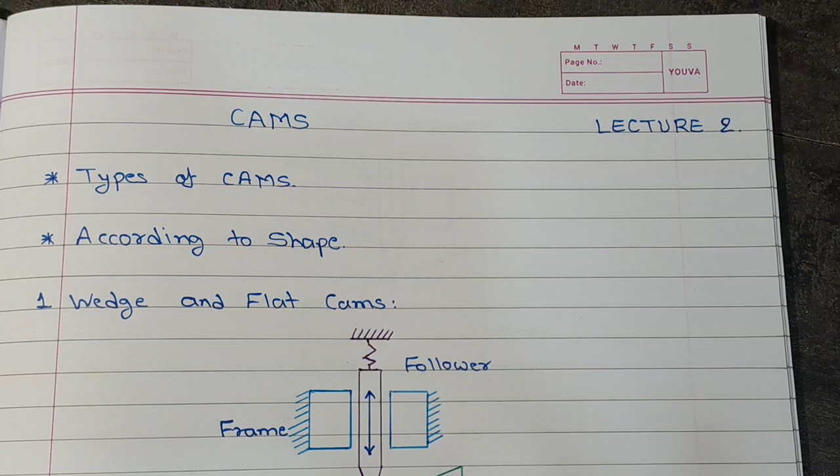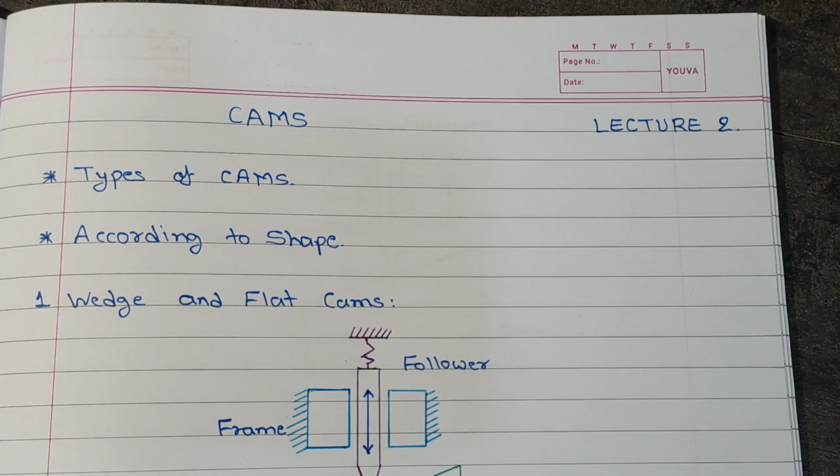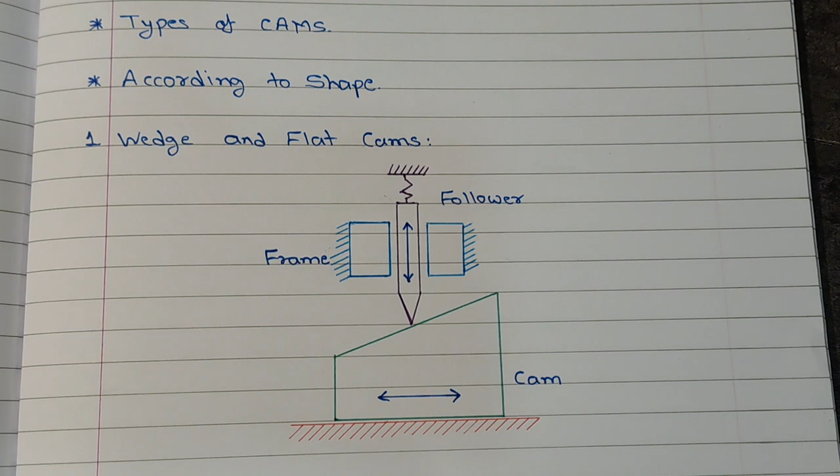डियर फ्रेंड्स, हम कैम का दूसरा लेक्चर आगे बढ़ाते हैं। हमने शुरू किया था दूसरे लेक्चर में कि कैम अलग अलग किस तरह के होते हैं, how the cams are being classified। इन दैट वी फर्स्ट सी द वेज टाइप और वी कैन से फ्लैट टाइप ऑफ कैम्स। उसमें अलग अलग जो अरेंजमेंट थी, ये पहली वाली, ये दूसरी वाली, जो वेज कैम है वो कैसे काम करता है वो हमने देखा।

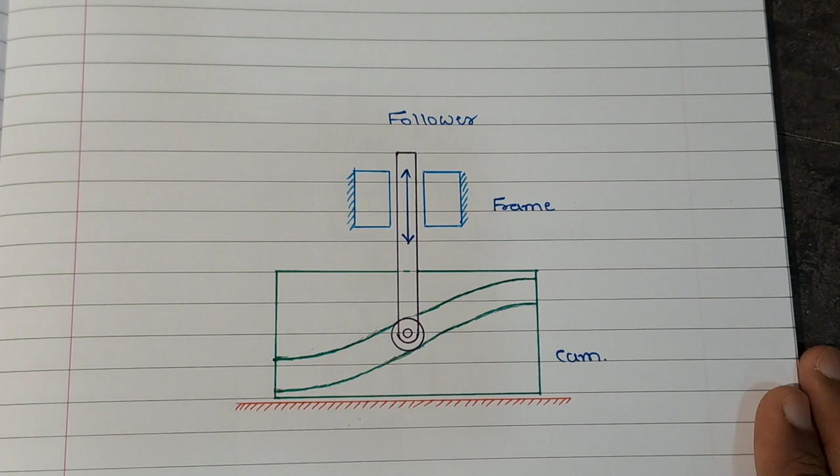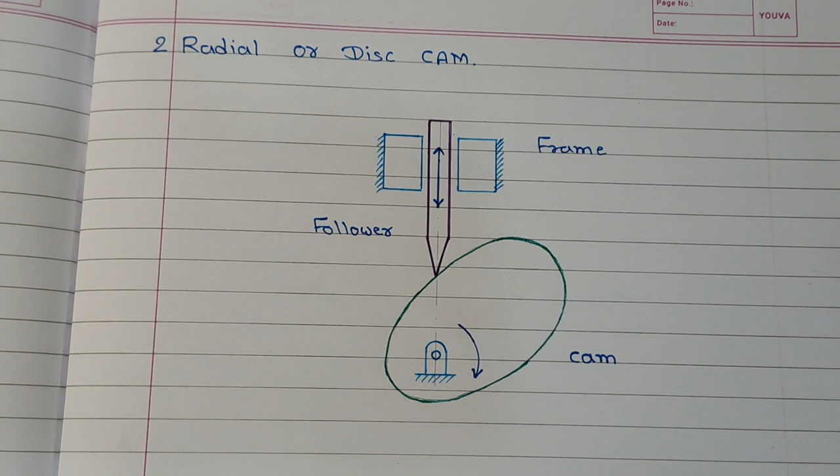Then we also talked about the radial cams and we also understood the importance of it, and we noted that it is the most widely and most popularly used cam. And one more, another type of the cam in this category that is also said to be a closed cam.

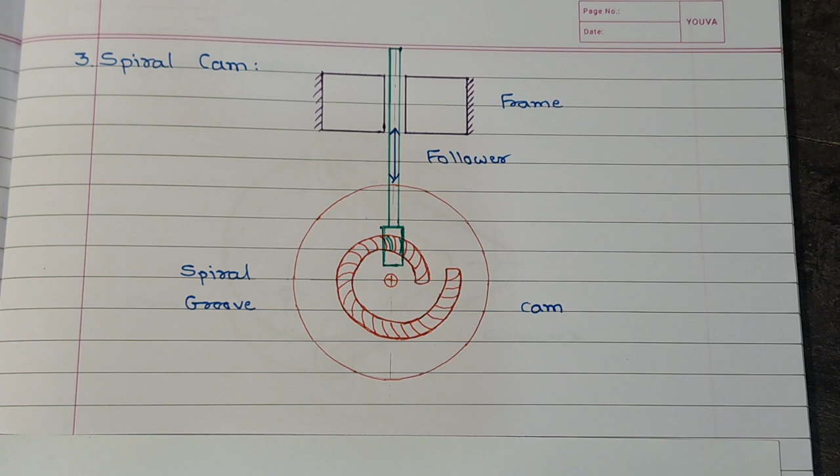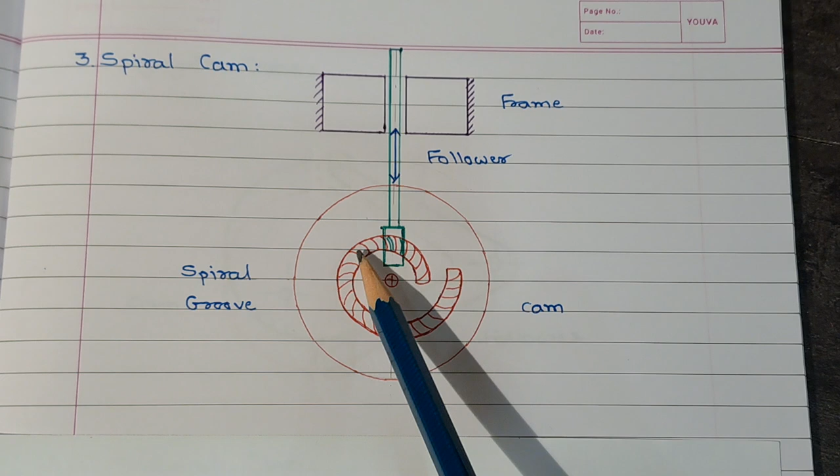अब कैम टाइप में हम आगे चलते हैं। थर्ड टाइप का जो कैम है उसकी रचना के मुताबिक उसे कहते हैं स्पाइरल कैम। The name itself indicates its construction and functioning also। यू कैन सी हियर इन दिस कैम, which is generally a circular plate in which a groove is cut which is in of spiral shape। तो स्पाइरल ग्रूव एक कट किया जाता है, मतलब कि उसका रेडियस कंटिन्यूसली बढ़ता जाता है, एंड टीथ आर जनरेटेड इन दिस पर्टिकुलर ग्रूव।

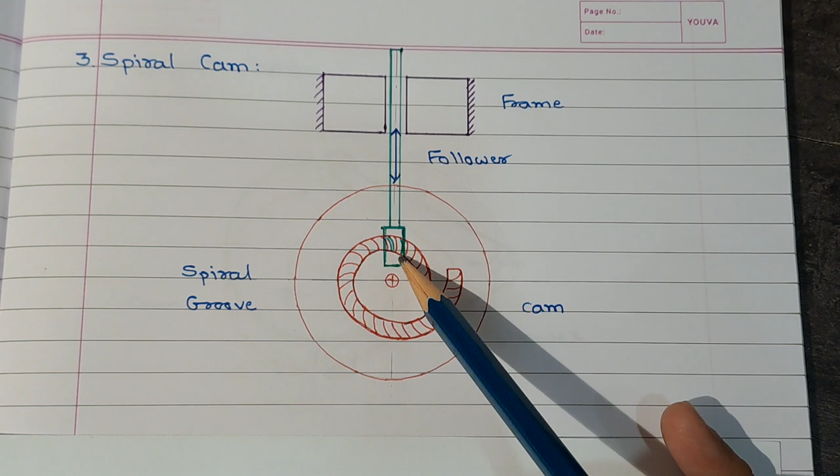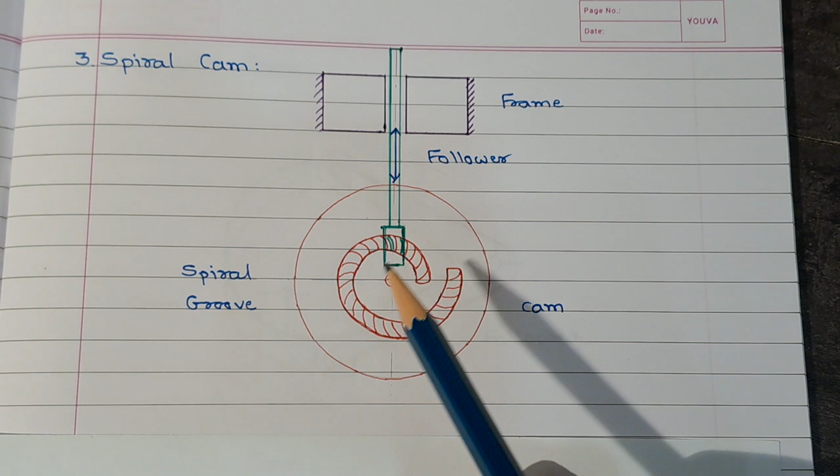एंड फॉलोअर में एक पिन टूथ फॉलोअर रहता है जिसमें भी ये जो स्पाइरल ग्रूव में टूथ बनाए गए हैं उसके साथ मैच हो सके वैसे टीथ से ये मैच होता है फॉलोअर। नाउ व्हेन the spiral cam rotates and there is a mesh of the pair of teeth of this pin tooth follower and the tooth of the spiral groove, the follower moves up and down depending on the radius of the spiral groove.

Here as it moves in the anti-clockwise direction, ऐसे जाएगा तो फॉलोअर विल कम डाउनवर्ड डायरेक्शन, एंड व्हेन इट मूव्स ए क्लॉकवाइज डायरेक्शन फॉलोअर विल मूव इन अपवर्ड डायरेक्शन। ये जो स्पाइरल टाइप का जो कैम है उसकी लिमिटेशन ये है...

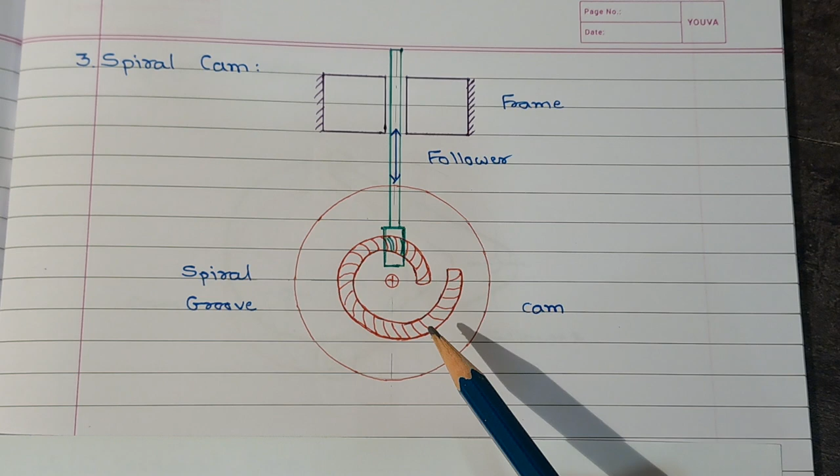...कि फॉलोअर को रिवर्स मोशन करने के लिए कैम को भी रिवर्ट मोशन करना पड़ता है। जनरली रेडियल कैम में या दूसरे कैम में ऐसा नहीं होता है, और स्पाइरल ग्रूव में ये फॉलोअर की ओरिजिनल पोजीशन में लाने के लिए या रिवर्ट करने के लिए कैम का भी रिवर्ट मोशन जरूरी रहता है।

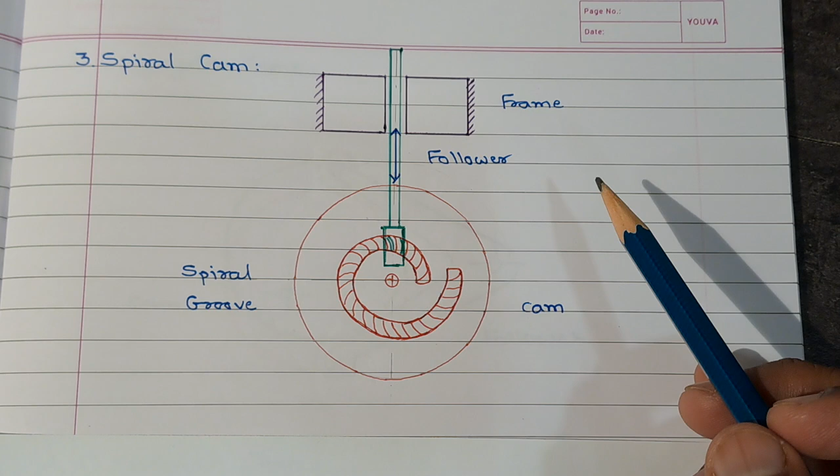This kind of cam is not much in use। अर्लियर डेज इट वॉज यूज्ड इन कंप्यूटर्स व्हेन CD ड्राइव्स वेर मच पॉपुलर। CD ड्राइवर का जो कैबिन रहता था उसमें CD कॉम्पैक्ट डिस्क को रखने के लिए उसको बाहर खींचा जाता था और फिर अंदर धकेला जाता था। उस वक्त इस तरफ का कैम का अरेंजमेंट यूज होता था।

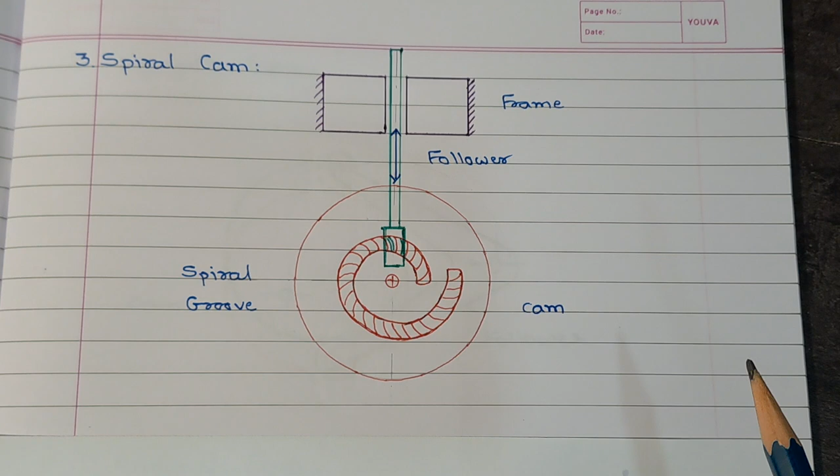इसका मैन्युफैक्चरिंग कॉस्ट ज़्यादा आता है, उसका फंक्शनिंग है वो कम स्पीड में काम करता है, बट उसका एक्यूरेसी बहुत ज़्यादा मिलता है।

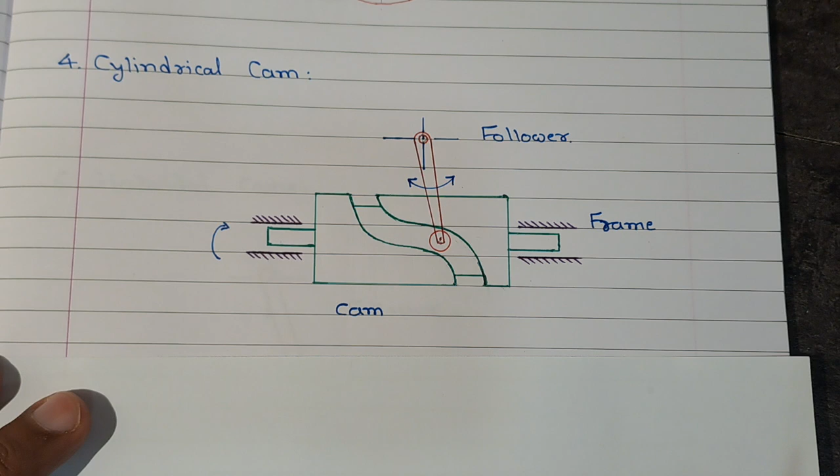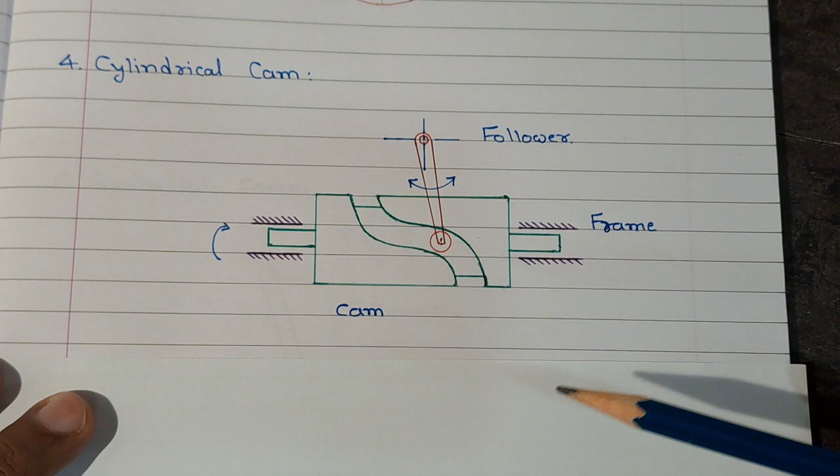अनदर टाइप ऑफ कैम इज द सिलिंड्रिकल कैम। इसकी रचना में एक सिलेंडर ही होता है, वो अपनी एक्सिस के अबाउट रोटेट होता है। This is a cylinder which will rotate about its axis and it is behaving like a cam and constructed by providing a groove on the peripheral surface। पेरिफेरल सरफेस के ऊपर एक ग्रूव काट दिया जाता है एंड ए रोलर टाइप ऑफ फॉलोअर इज प्लेस्ड हियर and it will make a positive movement on this groove on the rotation of the cylinder.

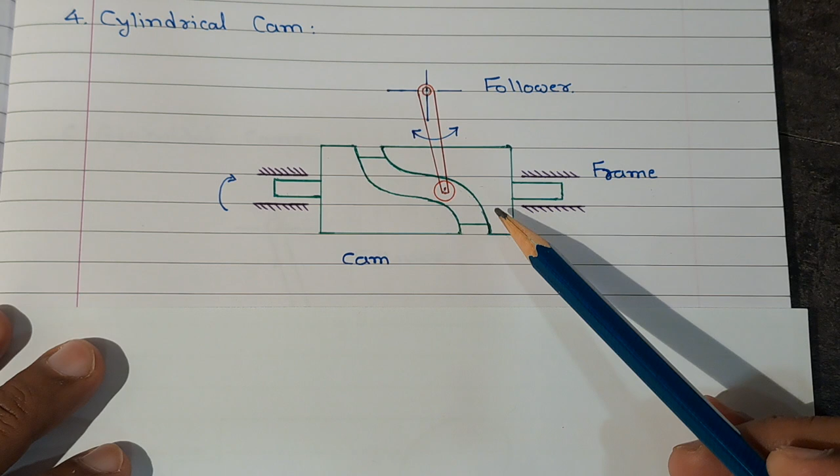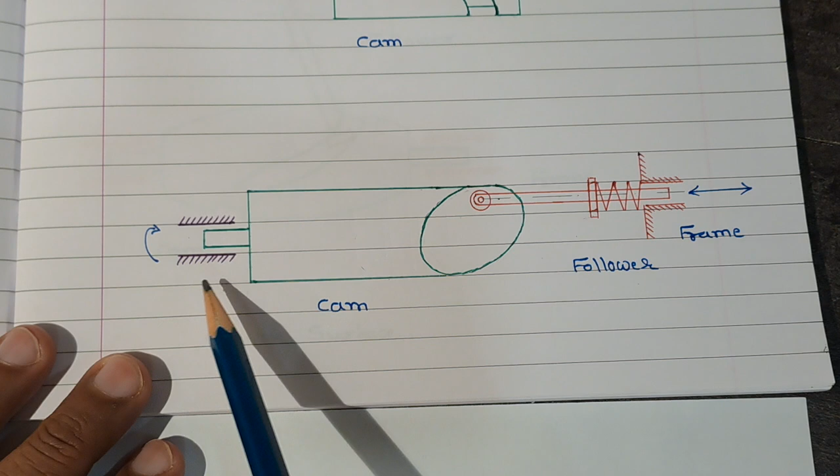So that will cause the oscillatory output motion of the follower। तो सिलिंड्रिकल कैम में दूसरी भी एक रचना पॉपुलर है। Here in the first, the groove is cut on the surface of the cylinder, while in second arrangement, the end of the cylinder is cut in a particular section, and a follower with end of the follower is in contact of this particular surface। When this cam rotates, because as the distance varies from this end to this end of this section surface, the follower will reciprocate in this particular direction.

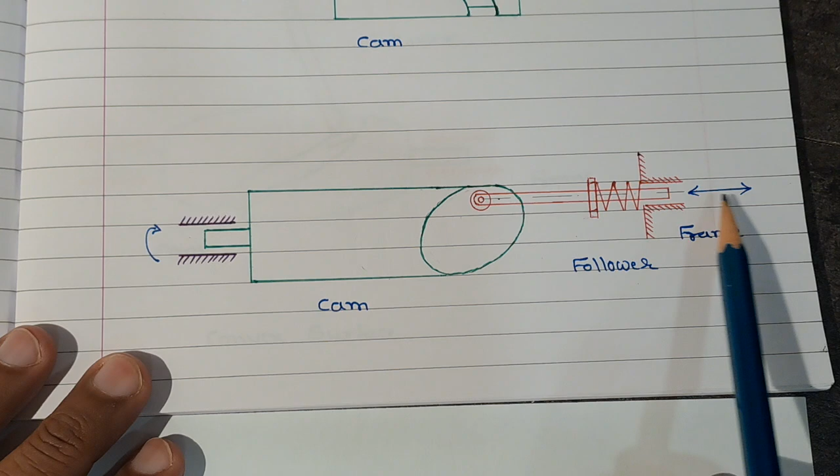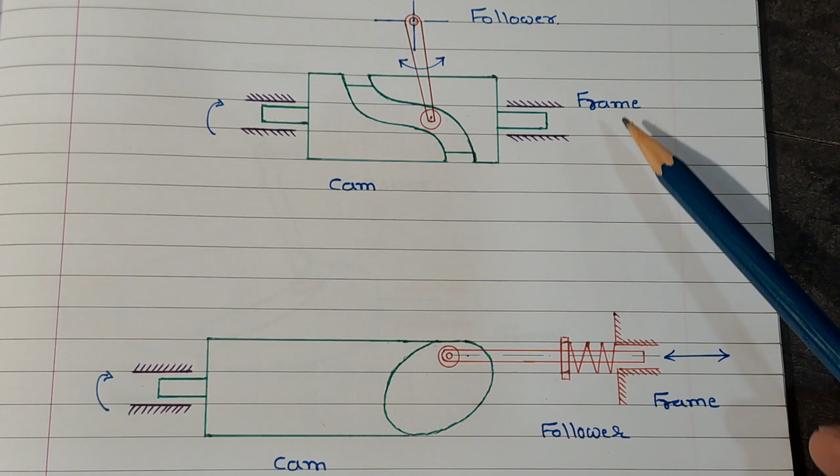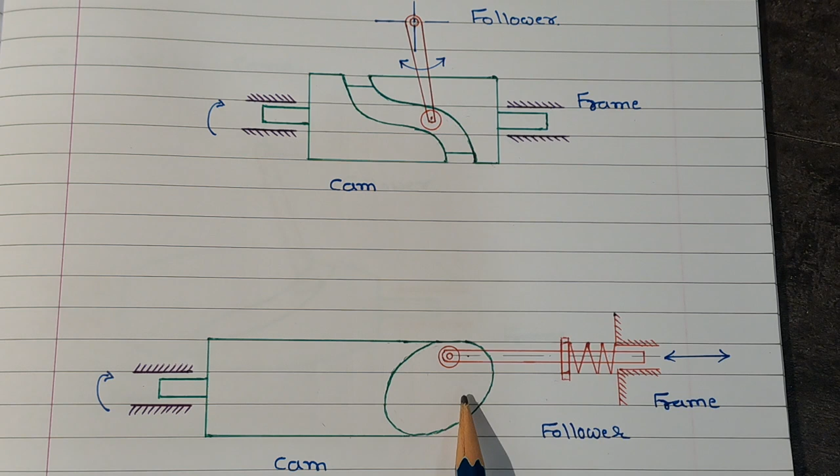So cylinder type के cam में दो arrangement possible है। One is this one, on which the groove is cut on the surface of the cylinder, and on the second, when the cylindrical part is cut to some angle to the axis of the cylinder, and hence the follower is kept offset to the axis of the rotation of the cylinder, and to and fro motion of the follower is achieved.

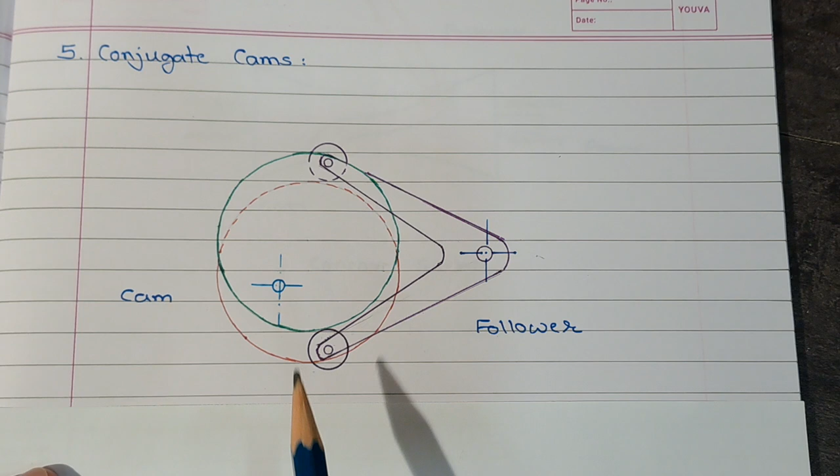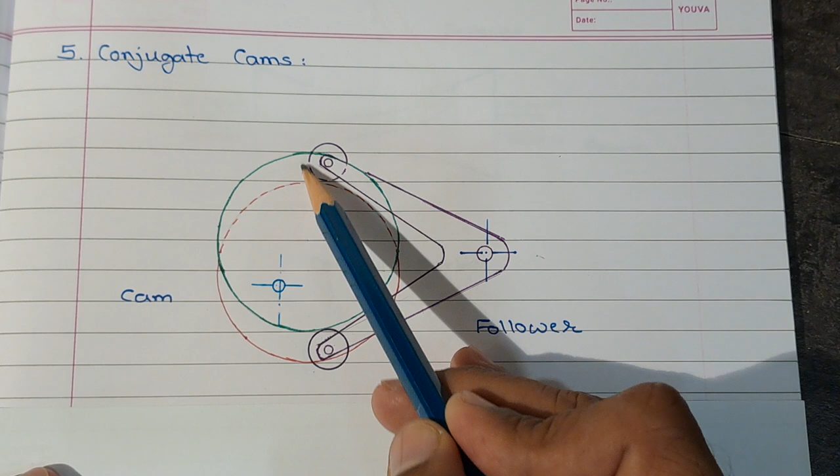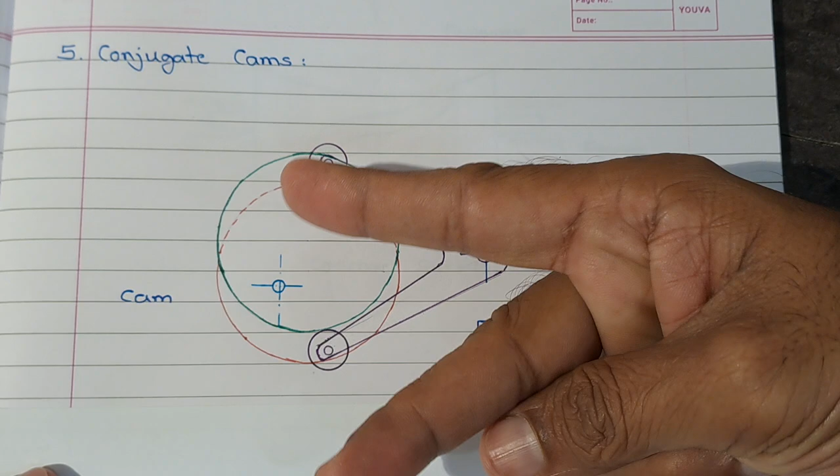And a follower with two rollers - the follower shape is like a fork, with two rollers at its ends. One roller will remain in contact with the outer plate surface, that is the green one, and the lower roller remains in contact with the plate behind the green one, that is the red plate. There is continuous contact of both rollers of the follower with the two plates, and once this plate rotates, these two plates rotate about this center, and this follower will oscillate in this particular way. This kind of follower creates very less noise and is very accurate. Where there is a requirement of very high control at very high speed and accurate motion, this kind of cam is used.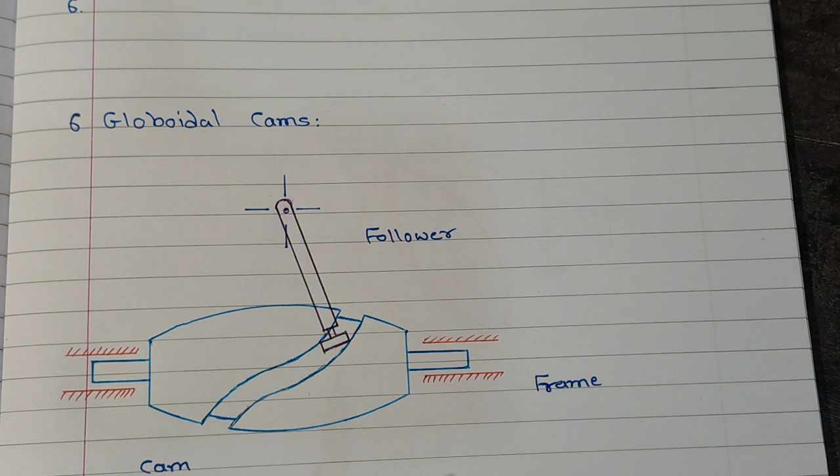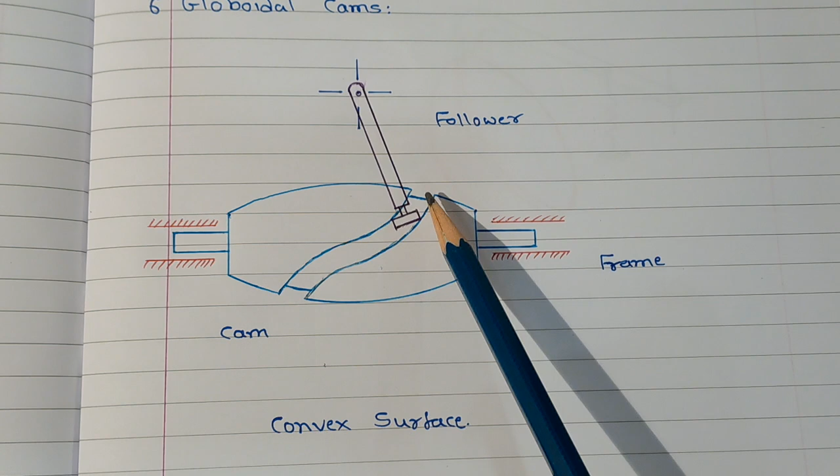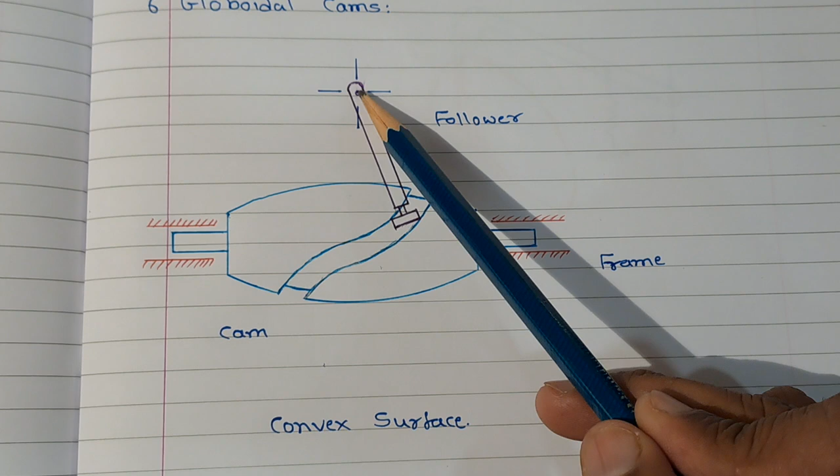Next type of cam we can call the globoidal cam. Mostly this cam resembles the cylindrical cam very closely, but here instead of a cylindrical shape, its shape can be of two types. One is the convex surface, like this, and on the periphery of that convex surface a groove is cut, and that cam rotates about this particular axis. Similar to the cylindrical cam, a follower is placed in this groove, and as this cam rotates, the follower performs an oscillatory motion about this particular fulcrum point. The benefit of this kind of arrangement is that it performs at low speed with a higher angle of rotation of the follower.

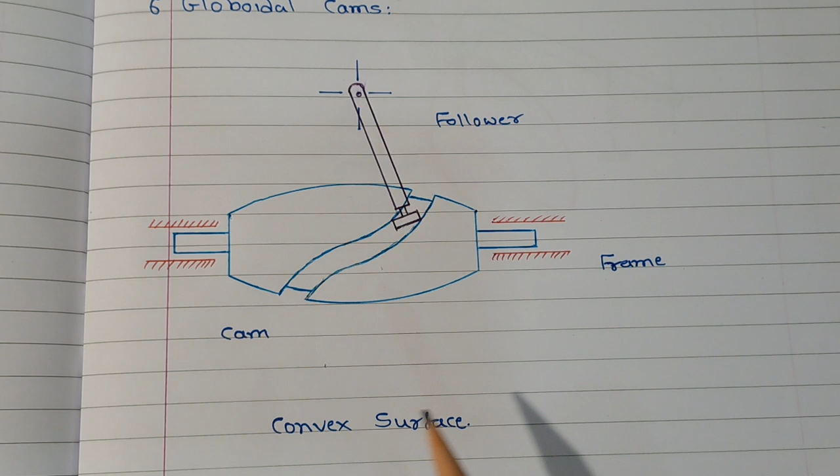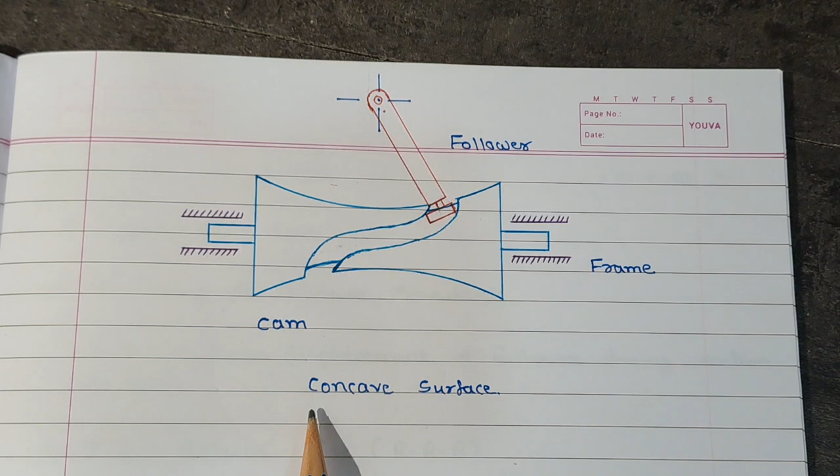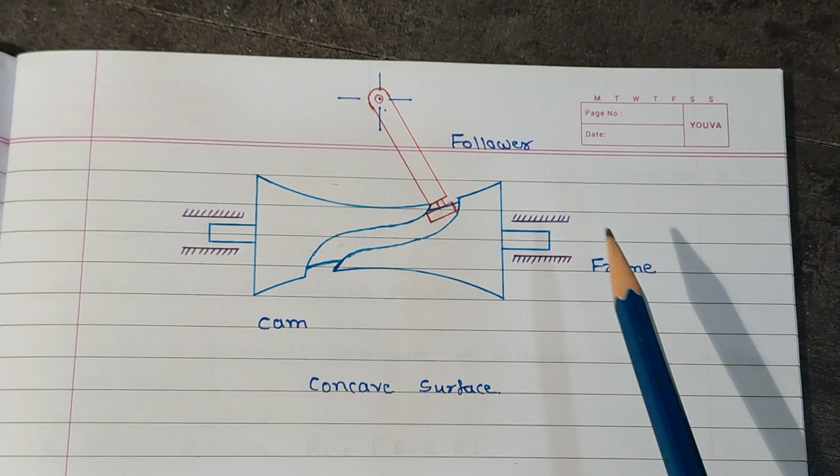Another arrangement is also possible - instead of this convex surface, we can go for a concave surface. So this is the second type of globoidal cam arrangement, where the surface is concave. You can see that the surface is of this concave shape. Again, similar to the convex type, a groove is cut on the surface of this cam, and it rotates about this particular axis. A follower is placed in this particular groove with this as a fulcrum point, and as the cam rotates about its axis, the follower performs an oscillatory motion about this fulcrum point. This also has the same benefit, that is it provides a larger angle of oscillation.

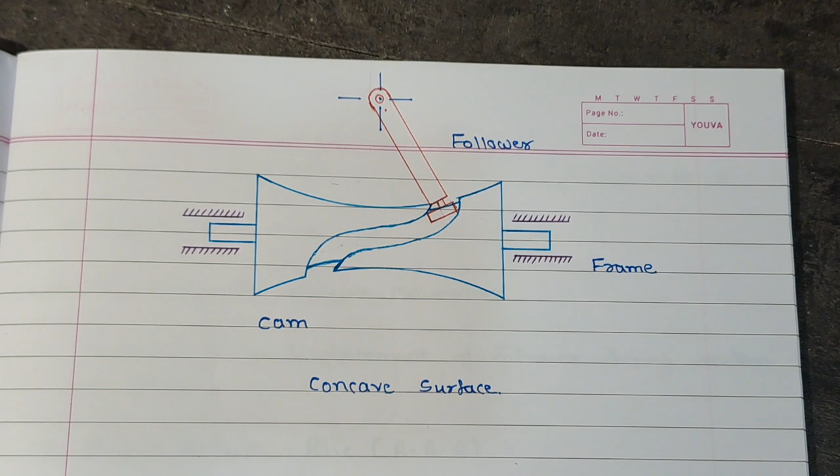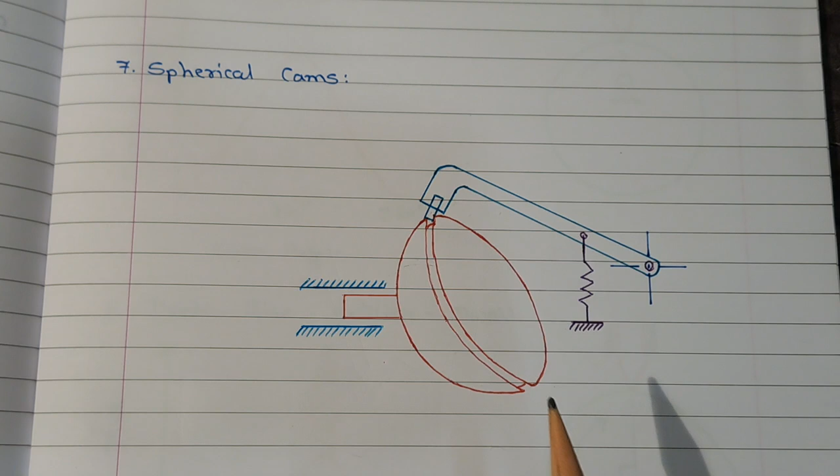So these are the different kinds of cam arrangements, and you can understand that depending on the requirement, there can be some modification in the shape and size. Also, there can be different combinations of cam arrangements as well as follower arrangements.